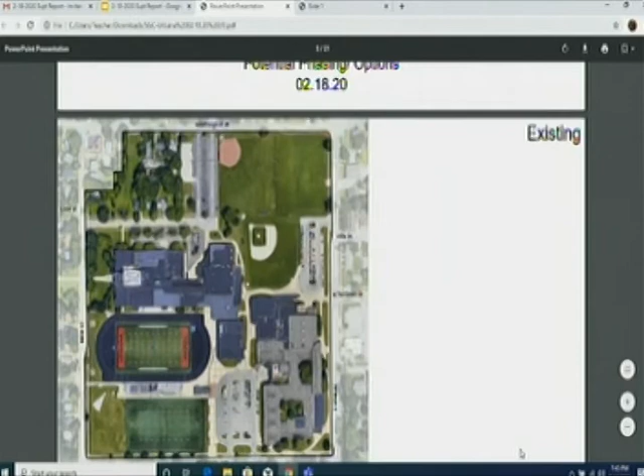Maybe. Okay, there you go. I can figure it out. I know how to use a computer.

So this is what you see today on site, obviously. This is what it's looked like for the last 10, 15, several years. There were some additions, the Aquatic Center, some other additions to the middle school, various other additions. But the site traffic has remained relatively unchanged in the last several years.

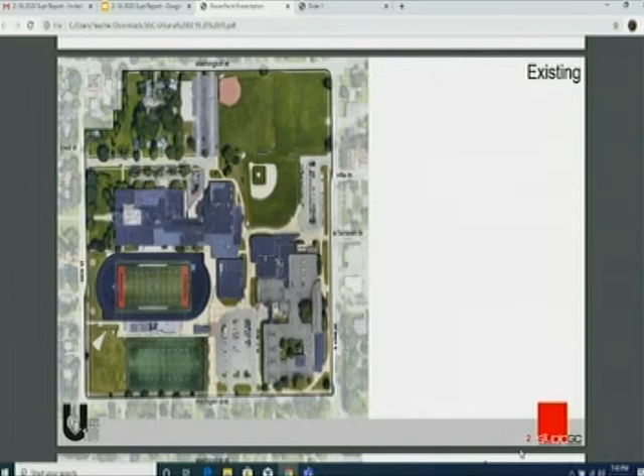So this is your overall menu. Everything that we've talked about over the last several months, probably since about May of last year, all of our meetings with the students, with the community groups, with you, with leadership team, administration, we've developed these several options here.

So the potential phasing on the North Campus is arranged so that you would do item 1 before you continue on. Items 2A through 2F are numbered so those can be interchanged and provided as you desire. Items 3 and 4, baseball and softball, are additional spaces that could be completed after the previous options have been provided or completed. The individual options, items 1 through 5, can be provided pretty much whenever you need them. You don't have to do something else before these, or you could do these before anything else happens. I'll explain those as we continue on.

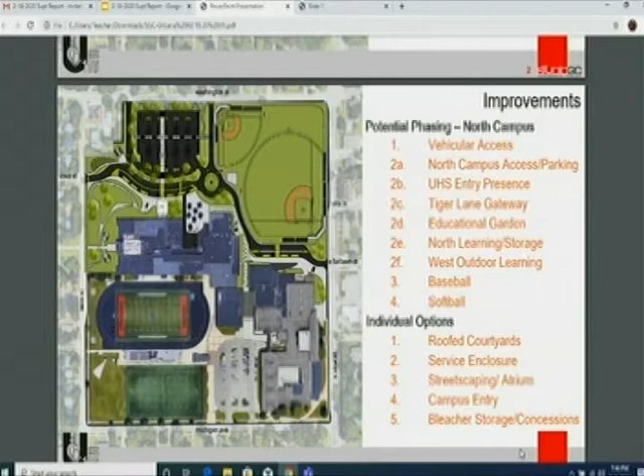So to get this project started, the main thing would be the main vehicular access onto the site. One of the main things was street alignment. From the west to the east, you can see the street aligning with Iowa on the west, and you'll see a bus loop on the south side, and vehicular traffic, student drop-off, parent drop-off on the north side. That continues along a partial roundabout, then continues down to the north side of the middle school, and aligns with Fairlawn Drive on the east.

So what it does is also allow additional parking where the student lot is now gravel, and extends that in pavement. With this, we are losing some spaces, but we are also gaining some spaces. What you'll see is a count of that, and where we see restricted, those are more or less temporary parking when bus loading is not during your bus pickups or drop-offs. So it could be for temporary parking during the day, for itinerants, or for loading zones or things like that. You see on the right the costs associated with this. These are obviously conservative estimates at this time, and as these options get further developed, we'll further develop the estimates as well.

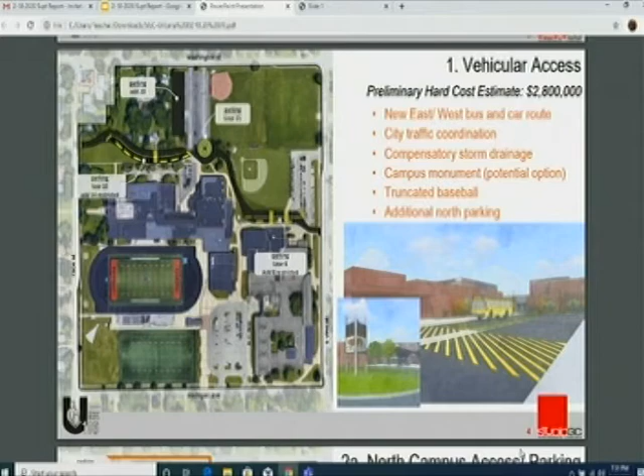So the next logical phase would be to complete the parking on the north side of the high school. The roundabout gets completed, and the realignment to Broadway to the north is more evident here. We also added a curb cut to the north where Race Street aligns, giving an in and out directly to the west of the main parking that connects to the student parent drop-off on the main Serpentine Road area.

We have a separate area for visitors—one big conglomerate of staff, visitors parking, you name it, it's there. There's a sidewalk about two-thirds of the way to the north separating the student parking from the staff parking area. That line can be moved up north or south depending on how many spaces we'd like reserved for student parking.

Those numbers right there show 114 staff, 15 restricted—that's still within the bus loop area—and then 78 student. But that 114 versus 78 split could be added to or taken away from, conversely.

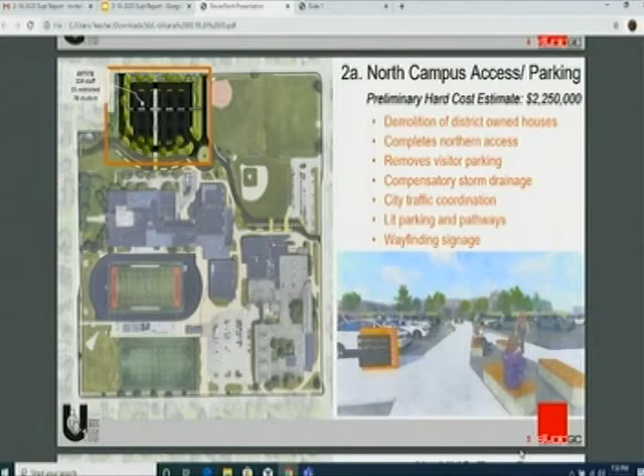Continuing on, this is where that friends and family parking does get completely removed, and this is with providing an entry presence at door 1 for the high school. Last week we talked about just having a canopy for it.

After further discussions, we said, how do we really make this a secure entry, for lack of a better term? There's plenty of area underneath it where we could build out a portion, or even relocate the attendance office from near Tiger Lane, and provide that as an enclosed area. That's what the diagram in the middle shows.

During school arrival, students could have free reign into the building. During the rest of the day, they would have to check into the area directly to the right of that vestibule, be buzzed into the building, buzzed into that vestibule, and buzzed back out to get into the remainder of the school—that's door 1 he's talking about.

It would look a little like if you've been to Yankee Ridge—you come in the airlock, go into the office, and go freely into the attendance office, then come through the door where you'd have access to the rest of the building.

Correct, because currently, right now, you just get buzzed in, then you have to walk several steps before you talk to some representative of the district. This way, you really do get a true secure entrance. It's important to maintain your secure perimeter—right now, the way you're buzzing people into the building, you're already letting them in. You're reactive at that point, not proactive.

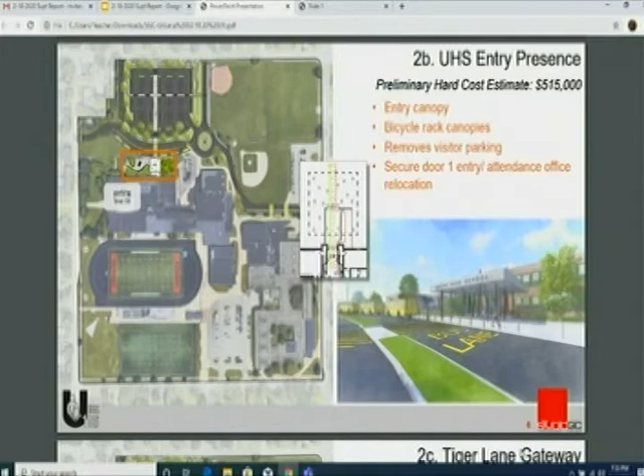Does that $515,000 hard cost estimate include building out the attendance office? That currently does not. It only includes the canopy, and to the west of that canopy there's some additional pavement area for student gatherings before and after drop off, and it removes all the parking. I appreciate that note, because we realized in discussion the other day there's an opportunity here. We just hadn't gotten to updating that, but before we finalize this and send it through, we'll make sure it's updated. Great, because there's a number of things to consider and we didn't want to throw a number out without full consideration.

It also includes covers for our bicycles, intended to encourage more bicycle traffic. I see one of those examples on a couple other slides here, but pretty much all the bicycle covered areas will be similar throughout the campus.

When you get to this phase, how far away is your accessible parking? Is it in the lot as you see there, or off to the right where you haven't touched yet? Currently, in this phase, it is located within the Tiger Lane area. There are additional spaces directly on the north side of the lot, so it would be a significant travel path. We do understand that. There are options as we further develop this, or if we decide to proceed, we'd have further discussions on where we want this to occur—does it want to occur to the south where the bus is, or do you want a separate area for accessible parking?

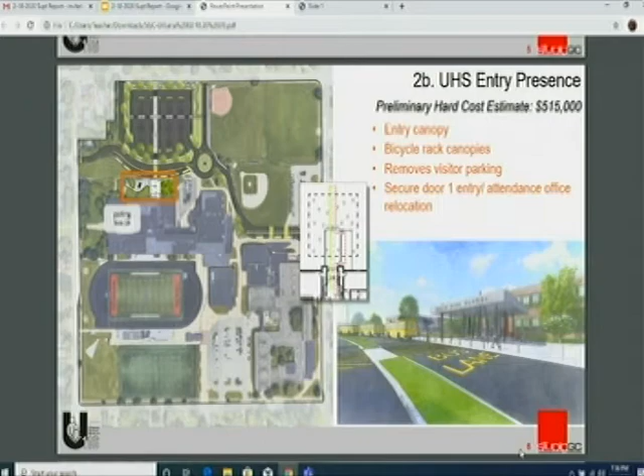That's one thing I was going to ask Corey about—during this time, when we start this, the health center, where will people be able to park for that? Will it be labeled specifically health center parking, or will they just have to try to find somewhere? That'd be part of our wayfinding package as well; we'd definitely indicate wherever the parking is for the health center as health center parking only. Okay, thank you.

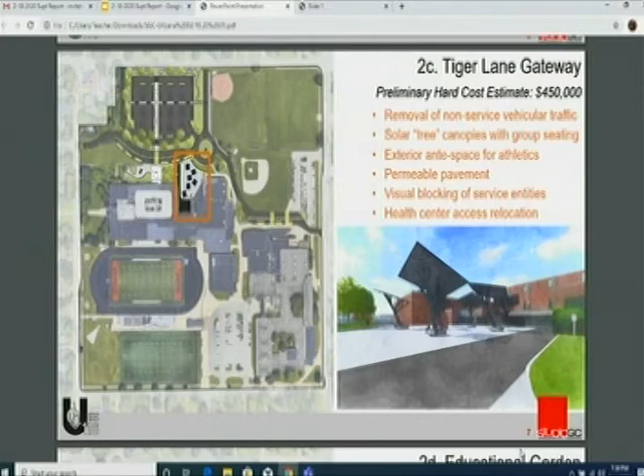So 2D is the educational garden, which replaces what currently is out there. And since it is to the north of Serpentine Road, it would require demolition of the current residence that is there.

So this is just one of the schematics that we provided. These would be permanent planters. The FFA could monitor this as well. We can include it as part of the educational program that was charged to us to provide several areas. This is just one of the areas we provide for outdoor learning options.

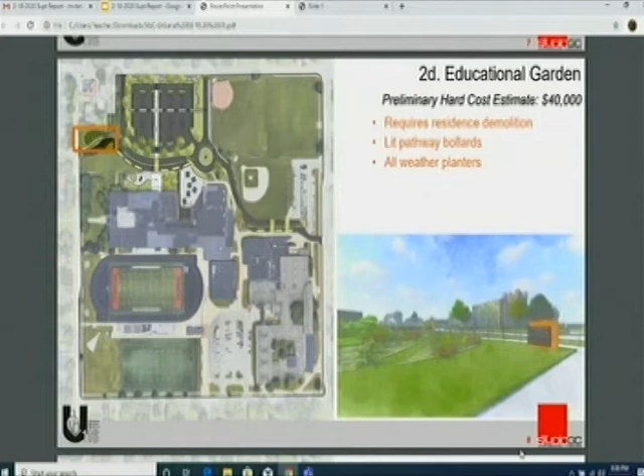And the thing we were talking about, there's some opportunities that if you're doing option 1, you may want to look at option 2D as an alternate associated with that, because they're doing a lot of paving and a lot of work in that area, so you might be able to realize some kind of benefit from this kind of cost incorporated in that to make these affordable, or something that makes sense that you can do at that time. This also provides a bit of a neat entry into this end of the campus.

And then here is where we've lovingly called it our shipping container outdoor storage area. So it could be used for - obviously, shipping container is very cheap, cost effective. We could have outdoor seating in there. We can do your outdoor classroom. It is covered, it would be lit. There would be permeable pavement underneath it, so it'd be very maintenance-free.

Obviously, we do understand the fact that it is prime for being tagged, but it also could be something where we could have our students tag it first. This is again one of those opportunities, being one of those outdoor learning activity areas that kind of gets away from the school, gets the students outdoors, and gets some natural baking in the sunlight.

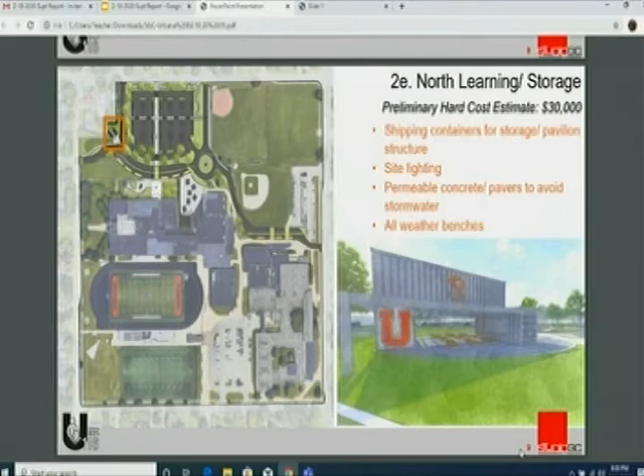Then lastly, in this first group of phasings would be landscaping and providing a walkway pathway on the west side of the building. One of the questions that was asked in our meeting over the phone last week is how many trees would we lose - and we actually would lose no trees the way we've laid out these pathways. Yes, the artist's rendering is kind of a little off, but we still arranged these so we lose no trees.

The main marquee sign on the west there, adjacent to Race Street, would also have to be relocated, but that was for minor costs. And again, this would all have lit pathways as well. As you can see, the grading really doesn't change too much, but the walkway, the pathway, and the benches dig into the landscape slightly, so it does provide a nice little elevation for seating.

It gives a really neat collegiate type feel, in my opinion, with these nice meandering pathways. Part of the reason they're doing what they're doing is because they're working around the trees you have, and all these chance meeting spaces and little circles that can be impromptu or intended educational spaces for when the weather's nice.

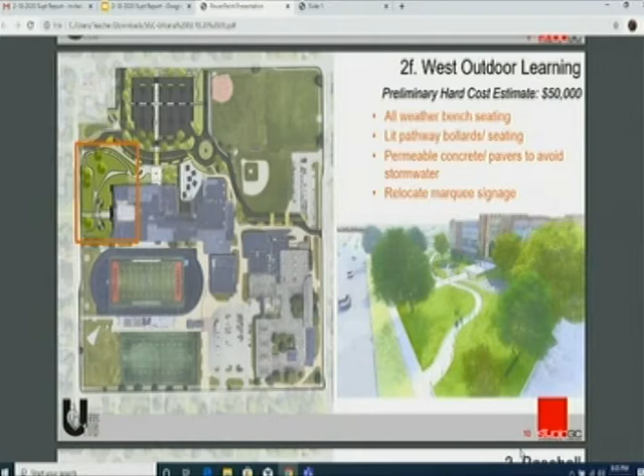So it's really neat stuff going on. I really appreciate how you broke this up into pieces, because we can add some of these later ones as add alternates when we bid out the main road. You could literally take your main road part and do this, or say, if we're already doing compensatory drainage or storage for the parking lot, what happens if we lump some of this into that, and realize some gains by just making that a little bigger? We don't have to do anything special later.

It'd be nice to have the ability to add some educational spaces at the same time we're building the road through it. There's definitely parts of this we don't have to do all at once - we could just do a portion, like doing the areas for the outdoor educational stuff, and do the ribbon road at a later time.

One thing you didn't say, that we asked about last week, is that the MTD cutouts stay on Race Street. Yes, that drive we're creating is not for MTD. MTD would still pull into the cutout and go along their way down the street like they do now. Thank you for clarifying, because that was one of my questions.

So maybe give them the option to stack a little more if their schedules change a bit - like for a big trip, if they need to pick up all the freshmen to go to the museum or something like that.

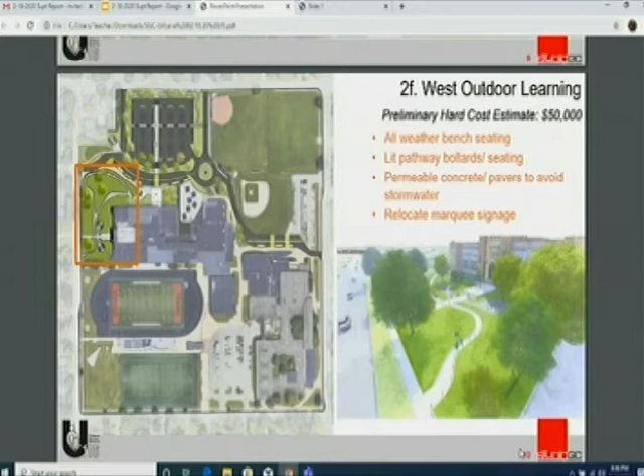Part of the fun of master planning is figuring out the gives and takes. Sometimes we have to show you - okay, our mission was, one of the statements was, how do we get competition baseball back here on the site? It's important to us. What is the impact? Well, that's the impact. So you guys as a board need to figure out what your priority is as you move forward about the direction you want to take with that, and if there are other means of accommodating it, or you say this is important to us and this is what we want to do.

We're showing this as an option because you can always choose not to do it and still have your parking spaces, but we wanted to make sure you realize that. This is the key spot where the road takes a funny little bend to fit that field in at some point, and it shoehorns it in - there's a sidewalk and the field, and it looks pretty tight.

So if we did not do this, would the road still have to take that little bend? Those would be the things we'd reconsider - you could avoid that if the direction was we are never going to do this, then we could straighten some things out and maybe make the parking work a little better. Those are things that could be considered, but we want you to be able to make the decision about that, understanding the impact on the future of what you decide to do with the site.

There was a great deal of consternation when the board decided to add the gym addition to the high school, which necessitated the removal of the baseball field to the east side of town. Baseball proponents in town were extremely upset, feeling that moving the field that far off campus meant games were less attended, people less inclined to join the team, and practice became difficult since players had to be transported after school every day to the Prairie site. So we were shocked that we even had the ability to think about moving the baseball field back. This plan allows for it to happen, should we ever decide to do that.

Putting the ball field there actually eliminates the practice field for football players. Are we going to start moving them onto our artificial turf for practice? That's another one of those give-and-take situations, a good point, to be continued.

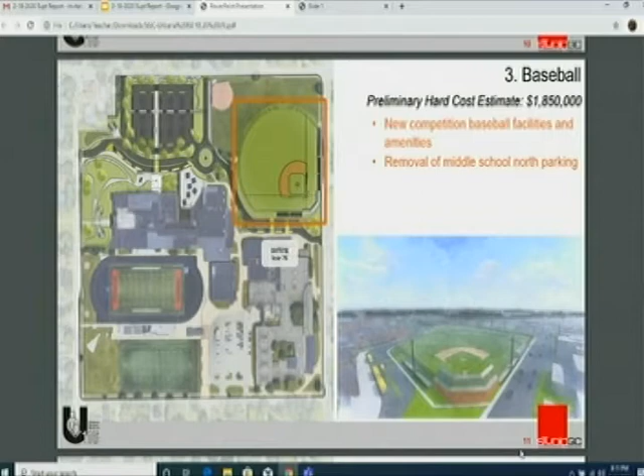This also has an effect because the middle school PE uses that field too. We'd lose the field for PE. That's not to say the middle school can't use the outfield for PE, but it's important for everybody to hear that the high school uses it too. We can design this so that PE can take place in the outfields. There's nothing that says PE can't happen in the outfields of the baseball fields. Actually, it occurs now in the softball and JV baseball fields. PE takes place there all the time in the outfields.

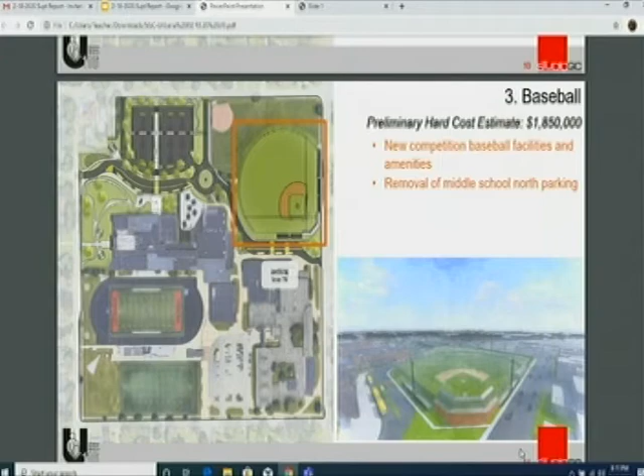Lastly, on the phasing portion, we're bringing the softball field up to a sectional grade field, so it has all the same amenities as a sectional grade baseball facility, just for softball now. The footprint is slightly shifted to account for the realignment onto Broadway, as was previously done. This now has both competition baseball and competition softball on your single lot.

So when you talked to us about both softball and baseball, did you say something about where foul balls are now going? What does that look like when a ball is hit? It'd be similar to going through a driving range, with huge poles and netting going across. Those would be provided throughout, to the west of the softball field and to the southwest and south of the baseball field, to stop balls. You're still going to get the high foul ball that potentially hits a car, but that's a challenge unless you put a dome over the whole area.

I just wanted you to share that, because I know you shared that with us. It's something to be aware of.

I'm seeing the brick structure that's built up there. Is there any type of concession stand or storage there? Directly to about the middle, south of the softball field, there's kind of a gray area that would be a centralized space for outdoor storage, bathrooms, and some concessions. It's right near the turnabout in the middle, a funny shaped gray triangle or rectangle area shown on the screen.

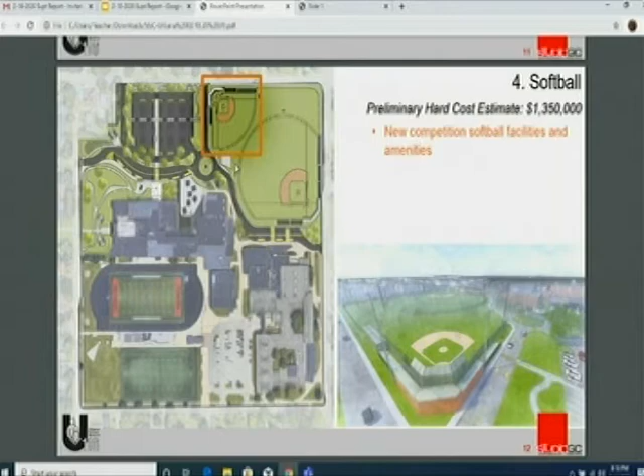So, recapping all the options provided for the north, I want to emphasize that the numbers you see there are in today's dollars. If we phase this over several years, those dollars will be escalated. Also, regarding the question about construction timelines, it's nothing unlike what you've been going through for the last several years. For the larger projects, we're limited to the summer, roughly 2.5 to 3 month timeframes. For some smaller options, we can carry work into the school session before or after.

But really, for the main portions, we want to get it done the day the students leave, and hopefully finished a couple of days before the students come back. But we understand how construction season occurs.

I will be looking, as you move forward, at what we can potentially do a month before school's out. Is there some realignment, are there utilities that need to be handled, keeping the old road coming across and starting to work on the north part? Maybe there are some things to just buy a little extra time. But it's a significant impact to this north side of the campus.

We're keenly aware of the time constraints associated with school construction. I think that would impact the summer school planning too, for the admin to be able to work on that, because we have such a short, limited amount of time. But it's very important work, don't get me wrong.

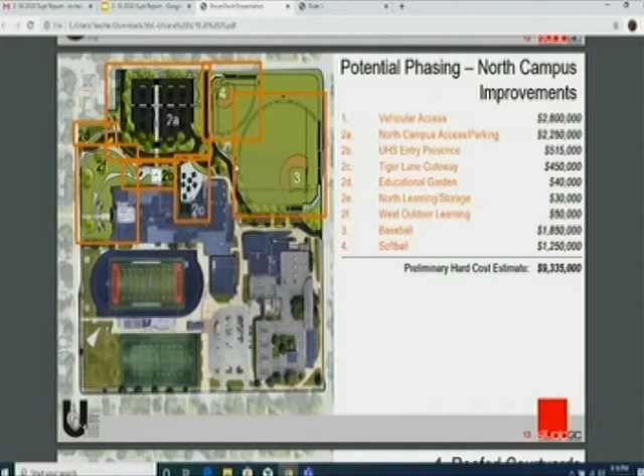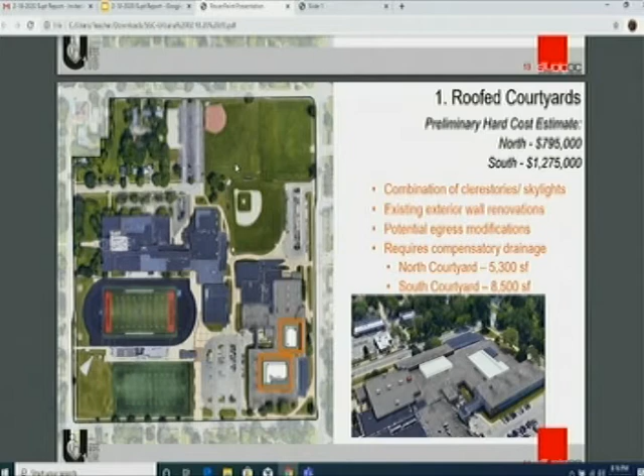The next several slides go into the options where things can basically be constructed without something else happening before it, or this could be before something else. We know, being a landlocked campus, there's not really much room for expansion to the buildings.

So these two options are basically enclosing the two courtyards within the middle school area. One of those discussions was increasing your science, technology, engineering, arts, and math programs, providing some flexible spaces.

Now these are indicated currently as single level spaces, but high atrium-like spaces within it with clerestory windows. So you'd get natural light into these spaces, and into the spaces surrounding these areas, but they could be used as breakout spaces for those classrooms bordering these atriums, these courtyards right now.

Could these spaces be used year-round, or are they kind of three-season rooms? They'd be used year-round, properly ventilated, cooled, and heated for whatever activity you'd like to desire to go in. They would not have the grass or gravel area - they'd be fully enclosed, with flooring, concrete slab, whatever finish we desire to put in those spaces.

Turned into complete indoor environments, with kind of a two-story, lofted feel inside, using clerestory lighting that runs around the top of a popped roof to get some lighting in, so those ancillary spaces on the second floor that have windows now looking in could pick up some lighting from that, so they don't lose as much natural lighting by enclosing the atrium.

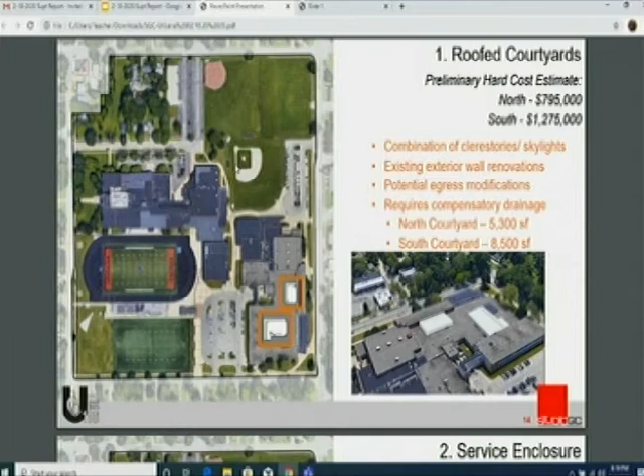Next section would be kind of enclosing the service courtyard directly to the south of the kitchen area, that access. There's some galvanized chain link fencing that has been provided temporarily. This would basically fully enclose that area with masonry that would match. We'd also provide some upgrades to the current masonry portion of the southwest that would mimic the rest of the building, doing some strategic staining to the brick so it would look like it was meant to be there from the beginning.

So Brenda, this is what you were asking about. The door they use to take deliveries into the kitchen, and where those dumpsters are, it kind of builds out an enclosure, to hardscape it. We are cleaning up what's already been mentioned as a bit of an eyesore.

Randy, what have you guys already added to that, like fencing? We used to do chain link fence around it. We just did a chain link fencing around it with some privacy slats in between, just to kind of hide the dumpsters a little bit, so it looks a little bit better. This makes it look a whole lot better. It is open air, so there's no roof on there.

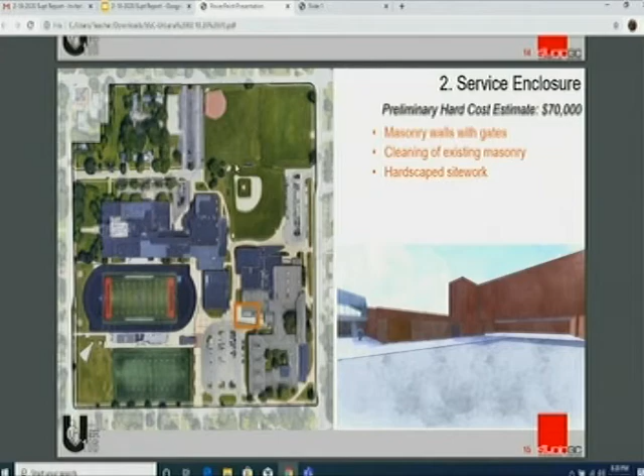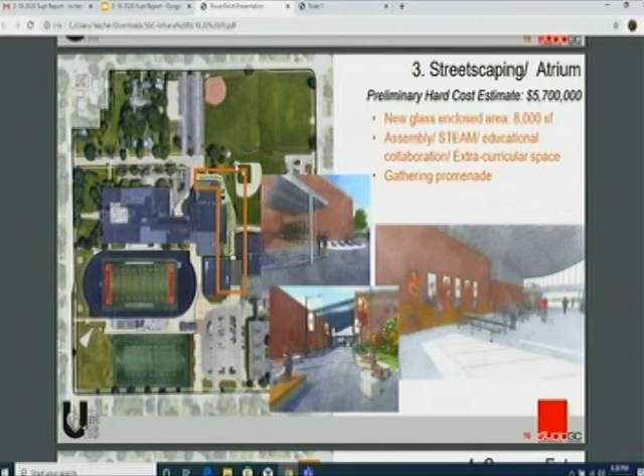So I saw something on 2D, but I don't think it was really built into the plan. I know you said you take the one out of where that path is going to be. Is there going to be something replaced on that side of the building as well? On the west side, that's just going to be relocated to avoid the intersection where the new street curb cut is aligning with Iowa.

So we'd have to align that marquee sign by the green space? In the green space, it's probably about the size of this table. So it'd be aligned strategically on that side of the building. So this would be brand new?

No, I know this part. I just wanted to make sure something was going to be at the high school, something staying as one of the other options. Yes, so we're not proposing eliminating any current kind of marquee type signage. We'd be moving it, just moving it to get new things in.

I didn't see it in the, you know, how they've got it written here. I don't see it on 2D. It's pictured there, but it's not really written. We'll add a note when we update this.

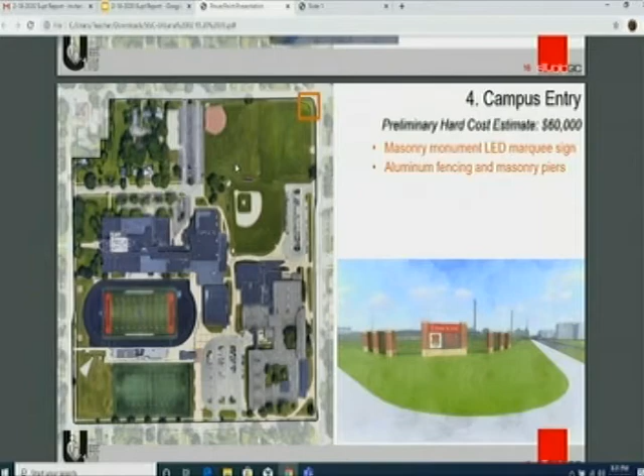There's a couple of pods that are already enclosed in the middle by the elevator. Yes, that's what I was thinking. Well, a couple of them, but then they're still open. There's one, two, three, maybe four sections that are not closed in yet.

I think the issue of concessions is fairly important, because when we first built the new concession stand, we anticipated all 4 windows being used. But the actual practice now is the south windows are used for the soccer field, and only the north windows are used for the stadium field. And it is insufficient.

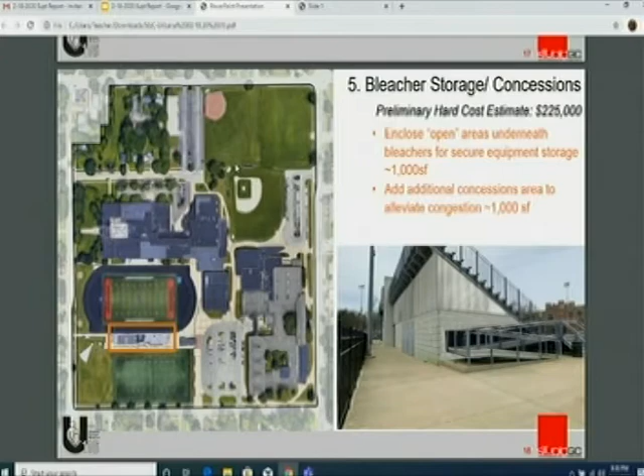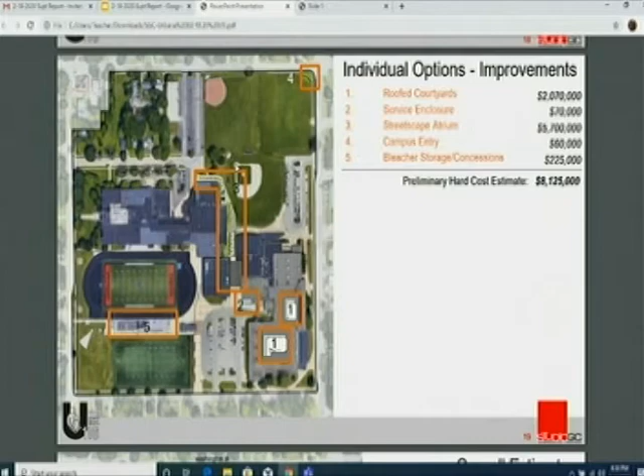And again, this is the menu of options with pricing as it is in today's dollars. And everyone likes to go to the bottom line for everything all together.

One of the things I've been working with Corey and others in our office on - the neat thing I really like about this is, while it's solving problems, it's also creating spaces. It's creating interesting outdoor spaces that'll benefit the campus feel and show a sense of pride of place, letting the kids show some ownership and extend it, so the walls of the school aren't the end, it's the whole campus, part of the neighborhood and the environment you're in.

It also shows a lot of care in addressing parking issues and alignment issues. There are some really important things happening on the roadways, picking up Broadway and realigning a few other roads, which will help clean up and solve the problems, but also create a better and safer environment for everybody.

I know you mentioned parking several times, but just on the traffic flow issues - when we were talking with you guys on the phone, I shared that as someone who drops a kid off there every single morning, we are so thankful and blessed that we haven't had a student hit, whether by a bus, car, or MTD. I'm thankful every day as I watch the pedestrian traffic, the car traffic, the bus traffic.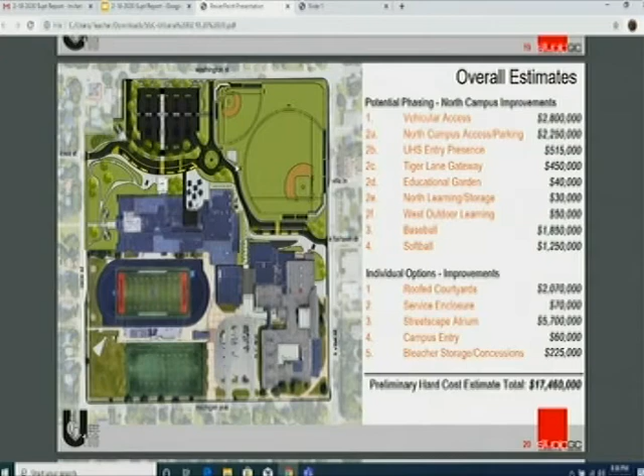That's exactly what I was going to say, because the way you've designed this looks beautiful, I think, and I really appreciate all the safety measures - I don't want to say barriers, but maybe levels is a better word. That's a good way to put it. It's something that's well needed, and I really like the concept, so thank you. Thank you.

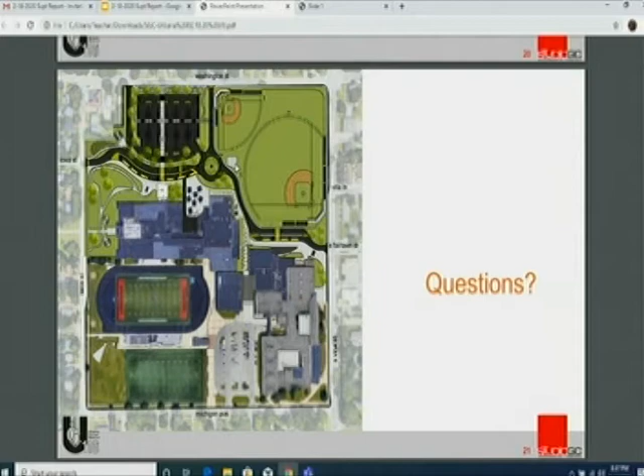Just a general question - I know there was a process of gathering the highest priorities from teachers, administrators, students, and the community, and addressing vehicular access was a top priority overall. But underneath that umbrella, did other things arise from those survey focus groups as to what the school community wants to happen next after improving the traffic issues?

I'm going to let Paul - do you remember? The traffic issues were absolutely at the top, and then adding outdoor education spaces was down a bit from that, across all groups. The field house - while the principals at the time were really excited about it - the community didn't really latch on to that.

So I can read the list, Peggy, if you like. Traffic flow and parking at Urbana High School and Urbana Middle School; the inclusion of a field house that would be used by both UMS and UHS, which you've talked about costs with; outdoor educational opportunities, exploring possible spaces for science, technology, engineering, art, and math - STEAM labs; additional flexible spaces; and then that last bullet just says other issues raised by the stakeholders.

The facilities committee also talked about doing stuff inside the building, not just on the exterior here, as part of the campus plan. So there's other work we could do with regards to interior planning.

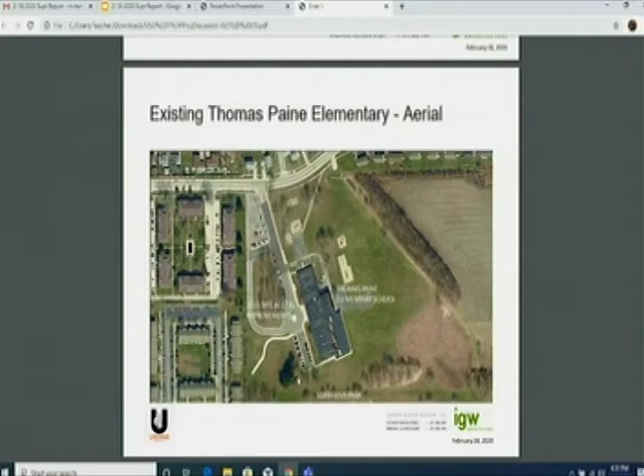To the immediate west of our site is multifamily residential. To the immediate east is a farmer's field, and I already mentioned Loman Park, so I think everybody's pretty familiar with that site. Our talking about Thomas Paine goes back to 2009.

The district started their initiative of new gyms, multipurpose rooms, and fine arts classrooms around that point in time, as I recall. It was at that time that we decided to have an initial meeting with all of the elementary schools and Thomas Paine as well, to talk about that initiative. I think we had engaged the principals at the time and maybe some staff members, ODA, facilities, and architects.

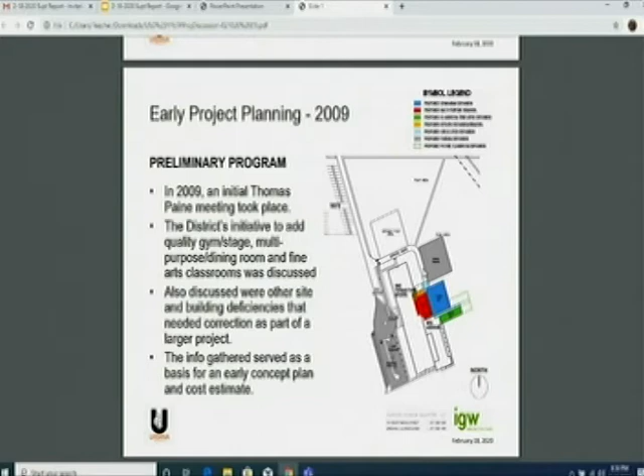Then the District sought some qualified school construction bonds—I believe it was for the Yankee Ridge project and the Thomas Paine project in 2016. To facilitate that request, we updated Thomas Paine. By the way, I think the QSCB was ultimately unsuccessful, which maybe led us to have to prioritize Yankee Ridge ahead of Thomas Paine at the time. I'm not sure I remember that correctly.

But anyway, we updated the preliminary program, the plan, and the cost in 2016. You'll notice that updated sketch does reflect the 2015 site access improvements that were made, which, by the way, included improving a staff parking lot to the south there—so that really shouldn't be gray in the sketch, noting that.

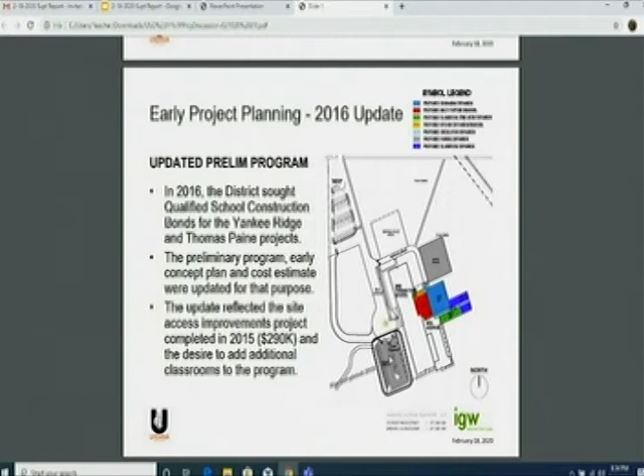We spent $290,000 on that site project.

So accompanying the QSCB was an updated program statement, which read as this. I've highlighted the key components of what we were saying in 2016: that we were going to have a 14,800 square foot addition housing the classrooms, gym, etc.

We had a better idea at that point in time as to the extent of the renovation of the existing 43,000 square foot building, and I can go through those, or you guys can read those. The other component would be the site improvements necessary to support the building improvements on the site.

Maybe I should touch on those. The addition was going to house the new gym with a stage, an expanded kitchen, and 7 new classrooms in 2016, 3 of which were the original fine arts classrooms. Then we decided that we wanted to expand the school by 4 classrooms in 2016. I don't remember exactly the logic for that, but that's what we decided.

The details of the renovation were obviously central air conditioning, which has been a goal for each of the elementaries, and existing windows replaced, similar to what we did at Yankee Ridge.

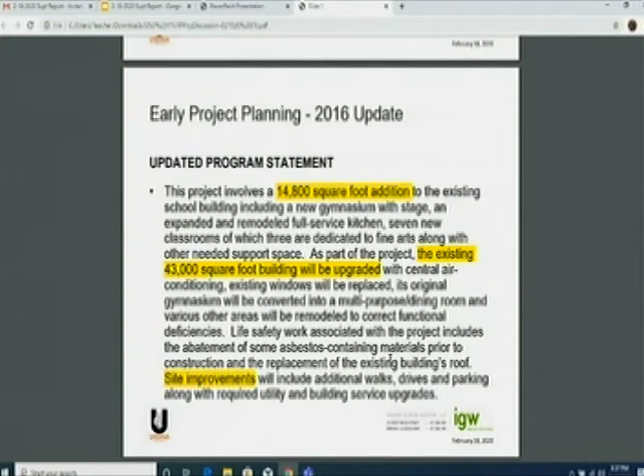So also accompanying that application, we updated the budget. The 2009 budget for Thomas Paine, we estimated at $8.64 million. And if you just escalate that to today's dollars, we think we're talking about a $10.6 million project with the same program. And probably you want to know how that was done.

Basically, I took the historical annual escalation factor of 3.5% over those 6 years. Now, that's not to say it's accurate yet, and the actual costs that we will face will be dependent on a couple of things. It will be dependent on our planning and design effort, where we say how much we need, as well as the local market conditions when we did the project.

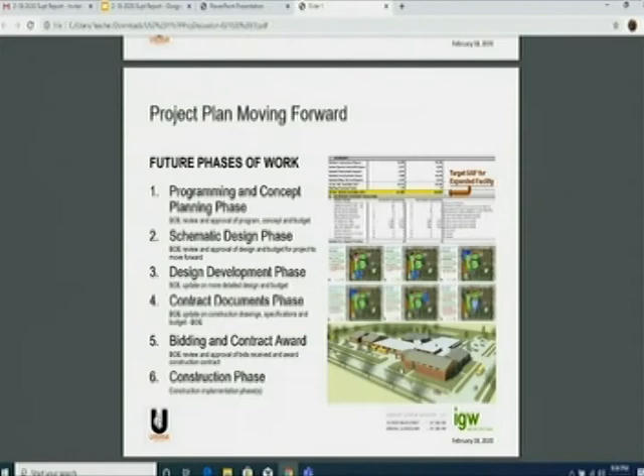So phase 5 is the bidding and the contract award. That's probably a month's worth of work - we issue the drawings and specifications for bid, probably a month. We receive the bids, and then we have a chance to review the bids. It comes before you guys, hopefully for approval. And then there's a period of contractor mobilization before we move to phase 6, which is the actual construction phase on the project.

Here's a slide that I told Jennifer I thought was pretty dry when I prepared it for her, but she thought it was still important.

Since we're getting close to potentially starting the programming and concept planning phase, the first phase of work, this gives you some idea of what the objectives of that phase are and some of the tasks that are going to be done. So phase 1, program development: to fully understand existing Thomas Paine operations, facilities, and deficiencies, and identify current and projected functional space requirements. In other words, providing the needs that require response in the subsequent phase of planning, which is phase 2.

Concept planning, to provide comparative conceptual analyses of expansion and renovation options for improving Thomas Paine, as well as developing a timeline and an estimated budget.

Phase 1 tasks, real quickly: kickoff meeting, collect and review all of the information necessary to do the project. We'll do a visual survey analysis of the existing building, become very familiar with what those deficiencies are. And then the extremely important part of phase one are the interviews that we'll conduct at the school with the teachers, the principals, and staff to help us develop the space needs and priorities. That ends up with this component space program document.